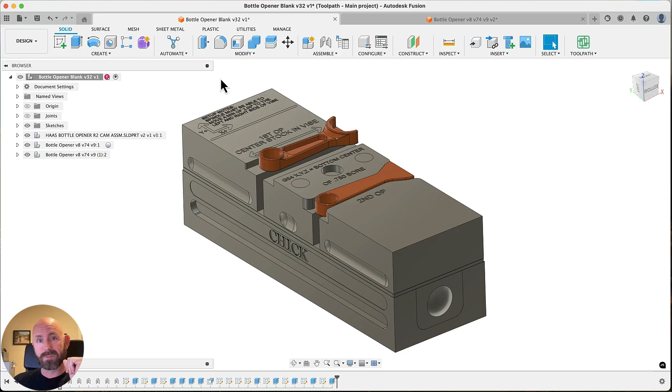All right, so here's the parts we're going to work on today for our chamfers. Some really good examples here of what I would call closed chamfers, just your basic chamfers. I think these are all the same size, but I'll show you a way to select these where it doesn't really matter what size the chamfers are. They can be all different sizes. And then we have some variable chamfers that change geometry throughout the closed contour. We have some 3D chamfers, and then we'll modify a part to show you how to machine this if it was a 3D chamfered edge with no modeled chamfer.

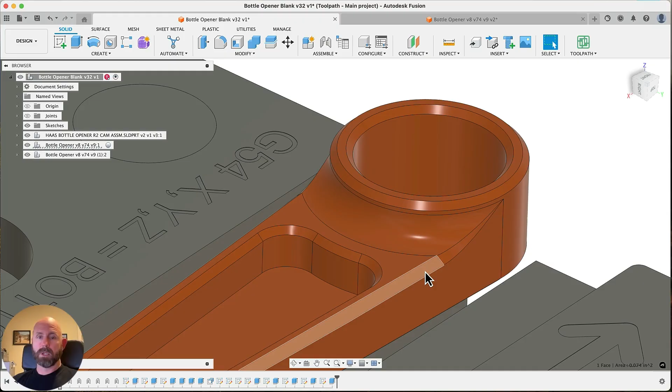And then we'll probably spend most of our time on this here, this kind of under chamfer. Show you a couple different ways to machine that with different tools. And then we'll show you this here, what I would usually call an open or blind chamfer. I think I showed you how to do that in a previous video, but I'll go into that a little deeper here. So with that said, let's get to work.

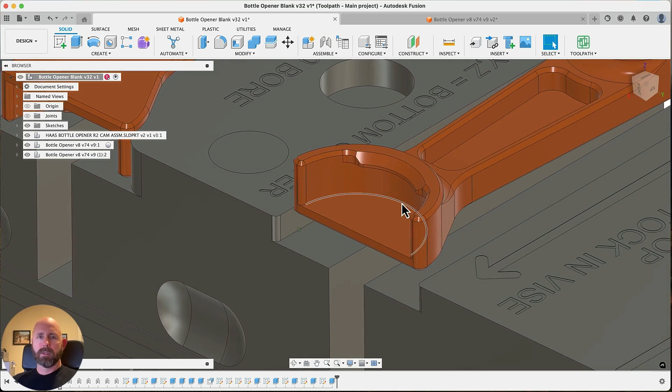Let's get some easy wins first. So we're going to go to the manufacturing tab. I already have the setup. I'm not cheating, but I just defined the solid as the stock and the part. So we're just banging on some chamfers. We want to start by getting our quick wins first, feel good about ourselves before we get too far.

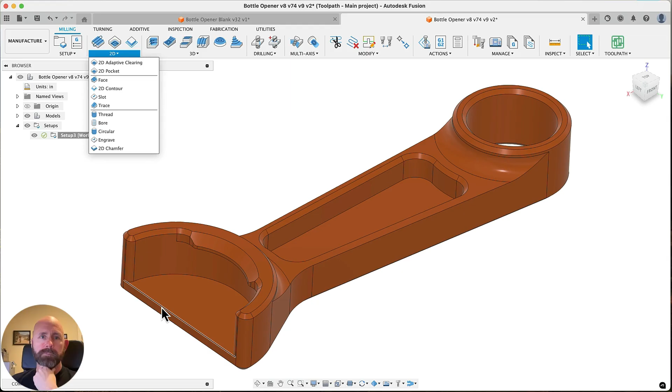We have two options. I like to use 2D contour for any closed chamfers like this, or closed contours. And then I save 2D chamfer pretty much only for this type of feature, a blind chamfer where it's going blind up against an adjacent wall. So let's start with a 2D contour. Let's get started by grabbing our 1/4 inch chamfer mill. I think we have one right here. And this is very simple.

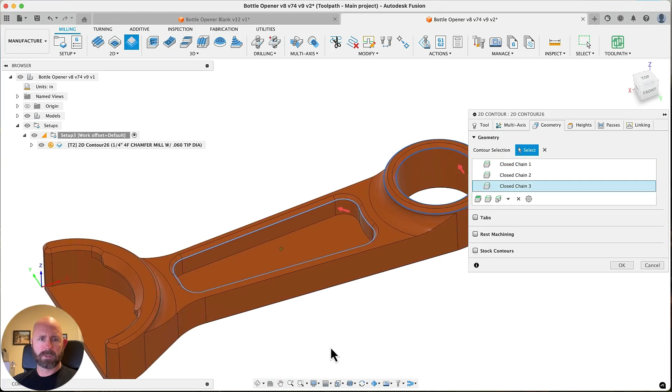I grab the bottom edge. Pretty much most people grab the bottom edge. And I grab all of my closed contour chamfers. So this would be the edge of the other side. And then let's just hit OK. I would not have done that, but I want to show you what we get with that. So if we go to this view and we come around, let's go over here, go here, go here. All right, this is what I'm getting at.

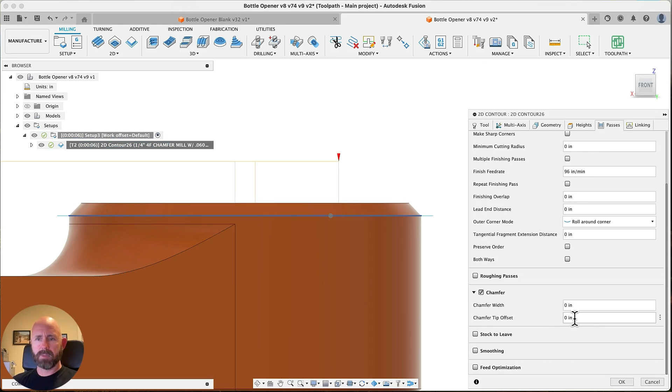So we get a one-to-one edge with that, and we don't want that. If anything's not perfect, you'll get a funny little edge there. Shouldn't be talking about a simple chamfer that long. So all we have to do is go to the passes tab and give it a tip offset of, really, we should be going as big as possible.

So when you get up to the better cutting condition of the tool. So if we go to simulate, go to that point. Now as we kind of push it through the toolpath here, we're way up. The higher you get up here, the better the cutting condition is, because the higher the surface speed, right? The closer you get down to a tip or a sharp tip tool, the closer the surface speed gets to 0. So generally you want to get up as high as you can, somewhere in the middle.

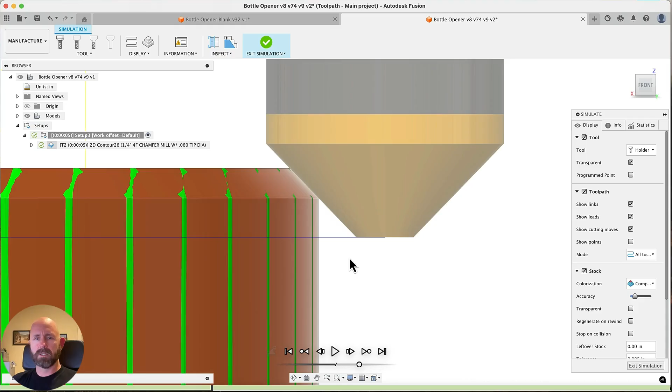Toolpath does a really good job of making these variable, but kind of utilizing the higher edge of the chamfer mill. So that works really good for that. So this was real simple. It probably took too long to explain that.

The next thing we want to do is probably talk about blind chamfers. So that's why I use this 2D chamfer tool here. And I would grab that, and honestly, I just hit OK. Now the magic behind that is that I have some really good defaults, and I'll show you those defaults. So let's hit simulate. Let's scrub down here. I think we're gonna just turn off the stock for now. But I like to get this open air here.

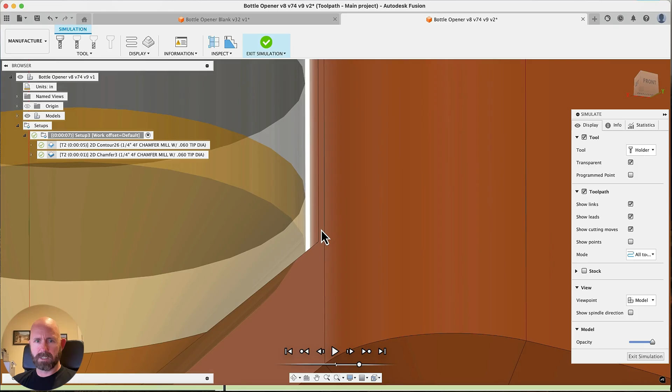So as I kind of scrub with my cursor left and right, I've shown this in other videos. It's one of the better tools you should know. Look at that clearance right there. Now we don't know how much that is, but I'll show you where to find that. And then you also have the upper edge of your tool, it's 10 thou above, maybe it's 5 thou, but it's 5 or 10 thou above that, and I'll show you where that's being driven from too.

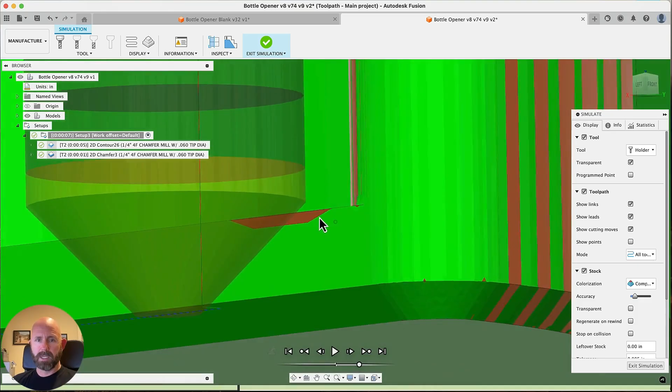But the nice thing is if you do turn on the stock, you can see how close you're getting to that edge. We could flirt with it and get even closer, but a little pro tip is the higher you get to this edge, the closer you get to that edge. So it's pretty basic geometry. That leaves a really nice chamfer there. Maybe hit this with a little fiber brush, a little wire brush or something if you have a little hairy stuff there. This is what we're making here.

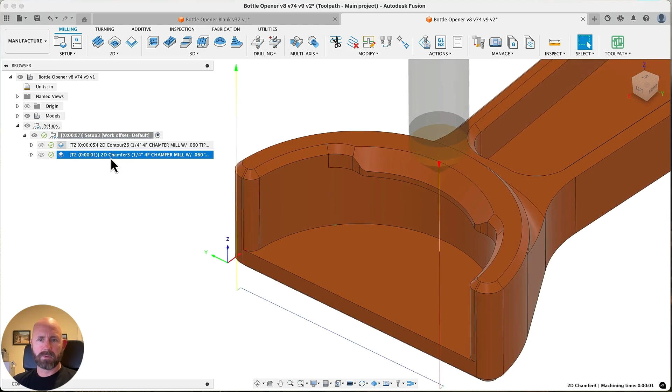All the toolpaths are in this here. So if you go down here, I have a bunch of locked toolpaths. So if you want to see how the key seat cutter and all that works, you can go do that. If you really want, we can dig into those videos. There's a little bit of a tricky key seat cutter move here that we can help you through if anybody needs that. So that is a 2D chamfer tool that sneaks you within 2 thou of this wall and gets really close there. So we've talked about how to do that in the past. I'll show it one more time.

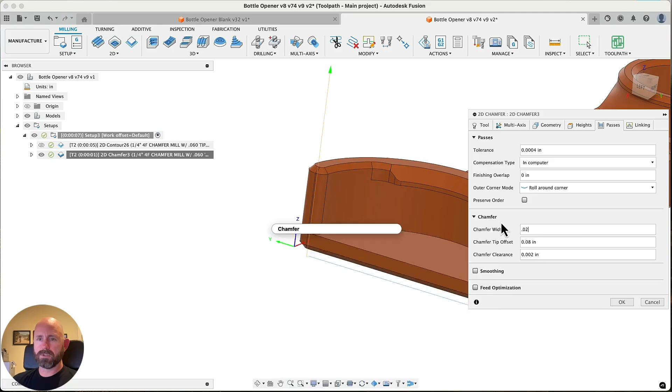It's pretty simple. It's taking the tool diameter, it's dividing that by 2. So that's half the tool. So for us, it's 125 thou. It's taking the tool tip diameter, the little flat at the end, and it's dividing that by 2. And what that's really getting is the cutting edge of the tool, right? From the flat up to the tip there.

And then what it's doing is it's subtracting the chamfer width. Don't worry about this, I'll explain this in a second. Because in that cutting area, you also need to account for the chamfer width, right? And then the next thing it does is this 5 thou. That's what I call your top clearance or whatever we want to call that. But that's where the top cutting edge is 5 thou above that flat surface. That's where this comes from.

If you're comfortable that your tool's accurate, if you're comfortable that surface is within a couple thou where it's supposed to be in the perfect model, 5 thou works good for me. Maybe you want to make that 7, 8, 9, 10, something like that. But this is a really good expression that I've been using for years, basically since this magic 2D chamfer tool came out. And then once you type all that in here, you're just going to go to these 3 dots and save as user default.

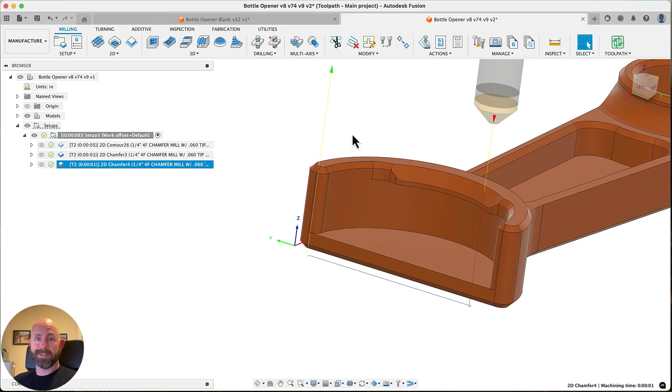And that's why that toolpath was so easy. I just went 2D chamfer. The last thing I did was chamfer, so that saved that. So there's 1, 2, 3 mouse clicks. Magic. So we have that done. Let's handle these odd chamfers next.

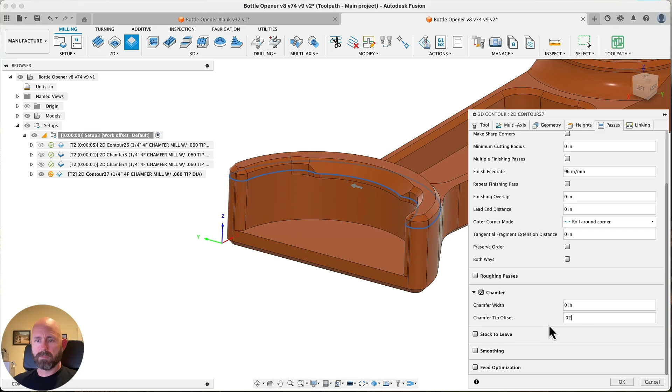So we'll come to 2D contour. Already have the chamfer tool. So we showed you with these chamfers, you grab the edge. I said bottom edge is what I meant to say over here. So what happens if you grab the bottom edge here, come over here, and give it, we'll say a 20 thou tip offset. It actually looks like it worked, right? So let's go see what actually happened.

So it looks good until you get there. So that violates the model pretty aggressively until it gets to that surface, and then it's happy. So how do we fix that? Well, if you go back and look at this, I programmed this a lot of years ago. If I come in here, you'll see I broke it into 2 different chamfers. To be honest, maybe I would do that again. Maybe I wouldn't. Treated them like 2 open kind of chamfers, which is easy enough to do.

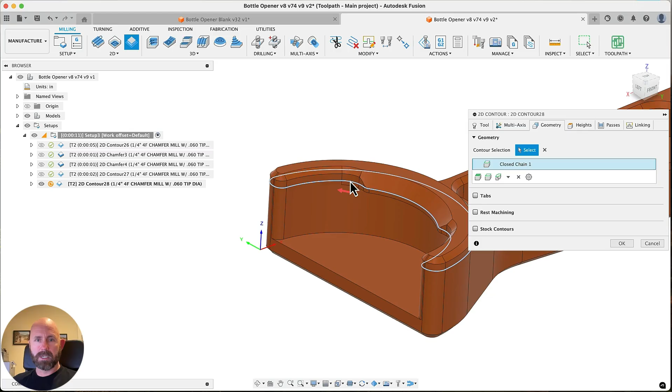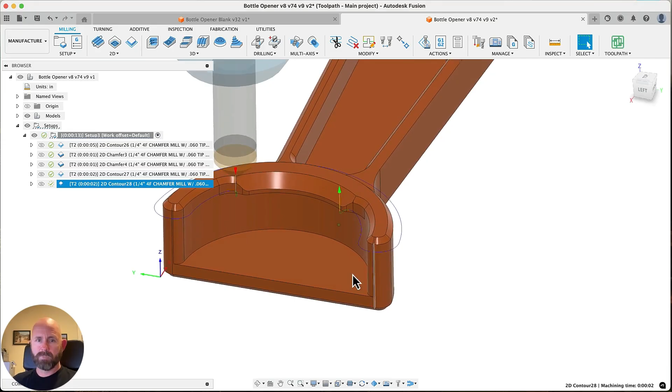You can go to 2D contour. You can click here. You could click it again. You could decide open chain, and then you can come around, actually kind of lead it that way, and then you can wrap it here and then there. Hit OK, and now we would come here. Give it some tip offset. So that will chamfer just that edge, right?

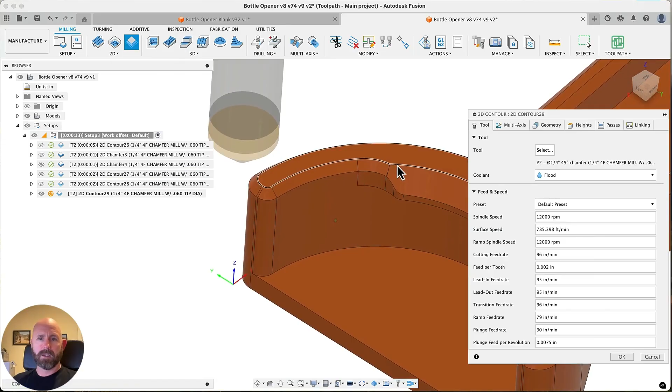I turn the stock off because I left that there. But you'll see it's giving me a good chamfer on that edge. But then you'll have to play with how it leads off and how that works with that. I wouldn't do that. If you get chamfers like this, you can just grab the top edge, and then let's say here we'll give it a 20 thou tip offset. Now I would actually make that bigger because I know what's going to happen, but I wanted to show you.

Let's go get rid of some of this garbage first so our stock simulation works good. Oh, I think I just got rid of the one I wanted to keep. No problem. So I'll grab this. We're going to give it a 20 thou tip offset. Looks like a good toolpath. We'll do simulate, turn stock on. And here's the problem, it's not violating our model at least, but it also is not going to chamfer that bottom edge. So we need to make that bigger.

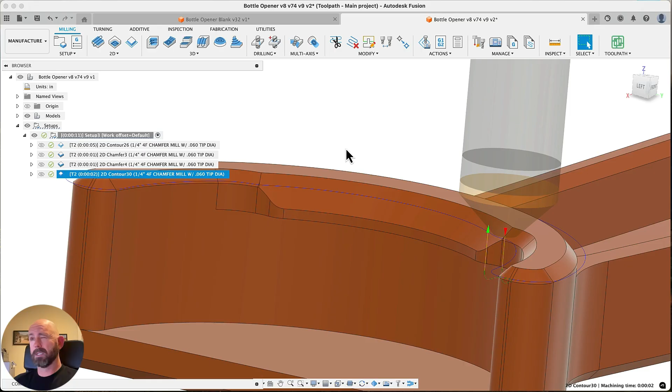Doing the quick math, this is 60, it's a 1/4 inch. We have a 1/4 inch 4-flute chamfer mill with a 60 thou tip diameter. So that's 125 is the radius, right? Minus the radial part of the tip. So it's 125 minus 30, you have 95. So I could give it a 95 thou tip offset, and that top edge would be equal to that edge. So let's give it a 75 thou. No, not negative. I'm going to give it a 75 thou.

This is my extracurricular activity. So these are kind of evening things for me. So my brain's already fried. Sorry about the mess ups.

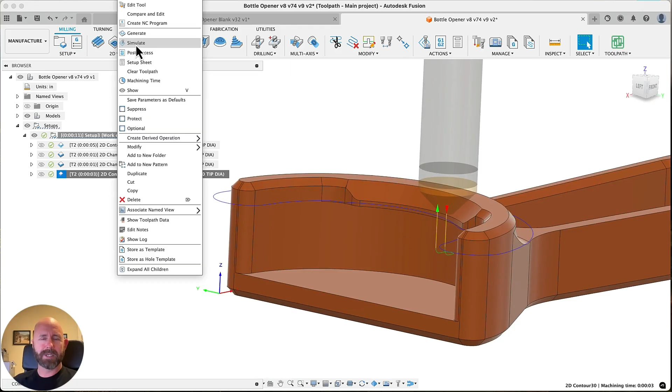All right. So now we're happy. Now we're cooking. This bottom edge is below that. The top edge is below that. I might flirt with that a little bit more and bring it down, but you get the idea. So that's how I'd handle that. I want to make sure to leave time for probably the biggest chunk of time we're going to spend on, this under chamfer here.

So first way to do that would be with a dovetail. And Toolpath is working on dovetail under chamfering. And that's probably the first thing you'll see for under chamfering with dovetails in Toolpath. So let's go grab a dovetail cutter. Yeah, so here's our dovetail cutter. And so you just grab here. Okay.

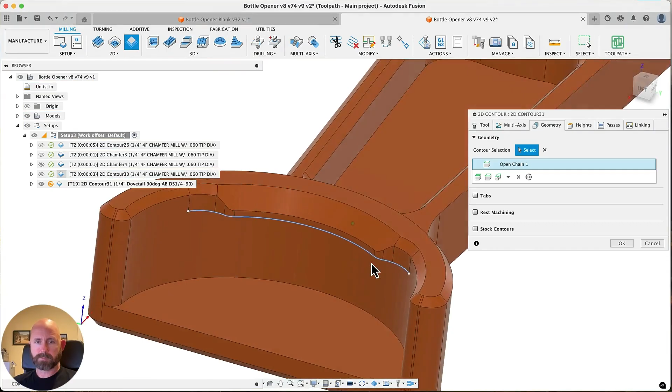If you've watched any of my other videos, I sure am tempted to just hit OK and see what we get. Go fix what we don't like. So let's simulate that. I'll stay consistent at least. I don't do a lot of things good, but I'm mostly consistent.

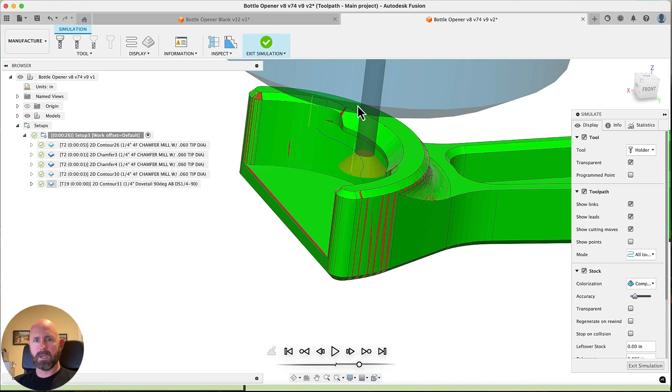So what's happening here? We're going online with that geometry selected. This would be a really good example of a situation where I would do inspect, I would do a section analysis, and I would split that sucker right there, because that will make our simulation visualizing what's actually happening way easier. If I come in here, you can see what's happening, right? So we're not actually chamfering. We might actually get rid of a burr for all we know. If we had a crappy burr there, we might get rid of it, but we're still going to leave a sharp edge. So how do we fix that?

The tool needs to come down and in. I do that with the stock to leave area in the passes tab. So if we go to edit, come down to stock to leave, we could go in 10 thou, -10, and we go down 10 thou. Now what do we get?

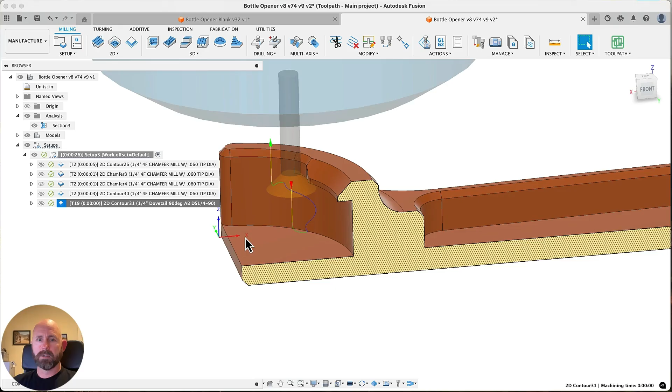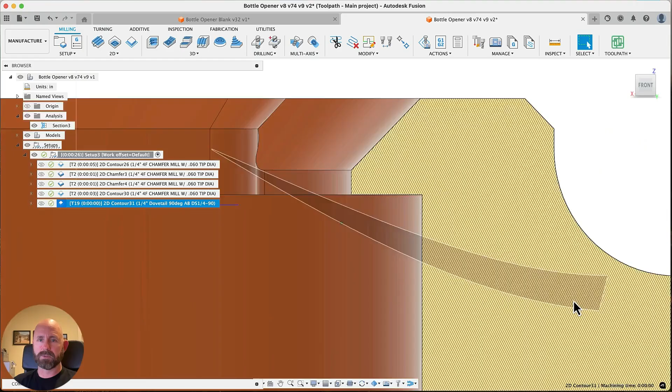I imagine some of you are screaming at the screen right now, and others are hopefully following and just listening. But scream at the screen is a valid reaction, because it's a 45-degree tool. You come down 10 thou and in 10 thou, you're still just touching it. You're getting rid of a burr, not getting rid of the sharp edge. So what we need to do is come down 10 thou and probably in 20, right? Luckily, it's a 45-degree tool, so the trig is very simple.

So go to edit, go back to passes, and then I'll just do -20. The axial is connected, so we'll break that and go -10. And that'll get us the chamfer we want. So we go there, go to front view, and let's advance this till we get the chamfer we want, right? Yeah, so that's good. That's exactly what I wanted. I wanted this 10 thou under it, and I wanted a 10 thou chamfer.

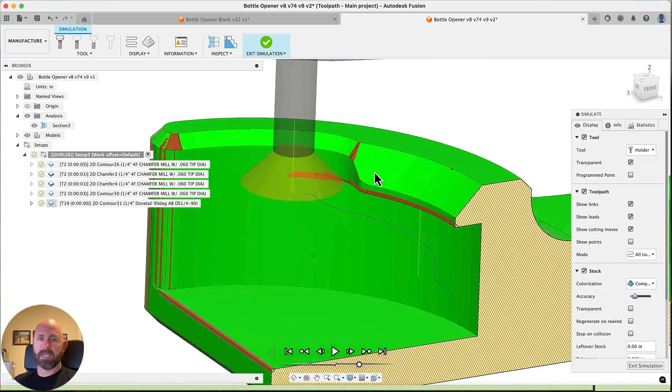Now, how does that look? Oh, so I just showed a problem there. On the lead out, we had a pretty good gouge. Maybe you don't care. My hope is that I'm showing you stuff that will let your parts come off the machine better, more consistent, less carpal tunnel from using these stupid whirly tools.

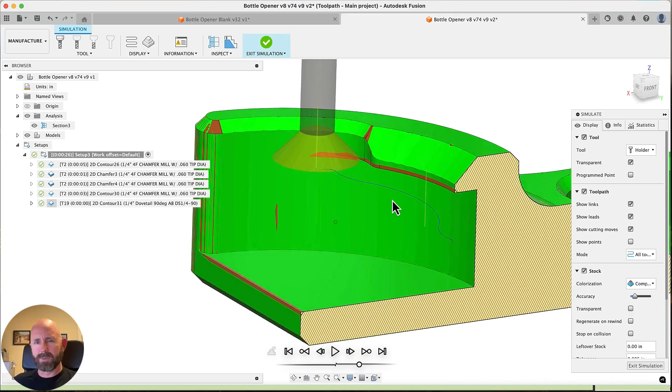But my idea is that you're not getting carpal tunnel. Your parts are super consistent. You're not scrapping parts by hand. So anyways, let's get back to this. How do we avoid that gouge?

Well, old school, before you had this automatic avoidance kind of 2D chamfer, or this other tool that I'm going to talk about in a second, we had to do this. We had to, and we still have to do it on these under chamfers. We had to come into the geometry tab. Well, first thing we want to do actually is get a good lead out. You typically don't want to do a radius lead out. So we're going to turn that off, meaning zeroed out. And we're going to turn on perpendicular lead outs.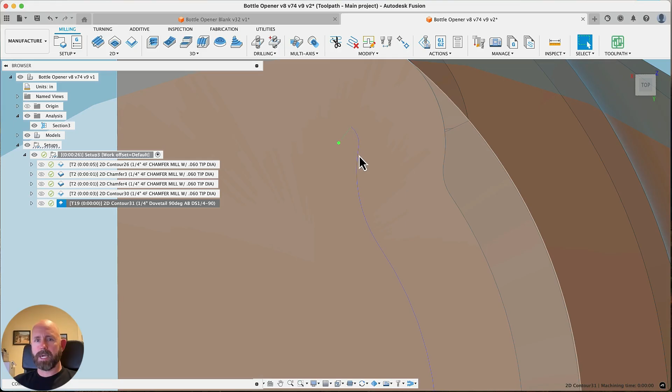That's not really going to fix our problem, but at least we know we don't have to worry about this other stuff. And the other thing we need to do is trim this backwards until it's not gouging that wall. So we're going to edit. A lot of people don't know about this. There used to be tangential extensions in the geometry tab. So you can do a negative tangential extension and pull the toolpath backwards. But the way you do that now is you either double click here or you right click and edit. And that functionality is opened up here. So if I open this up, it'll say start extension length or end extension length.

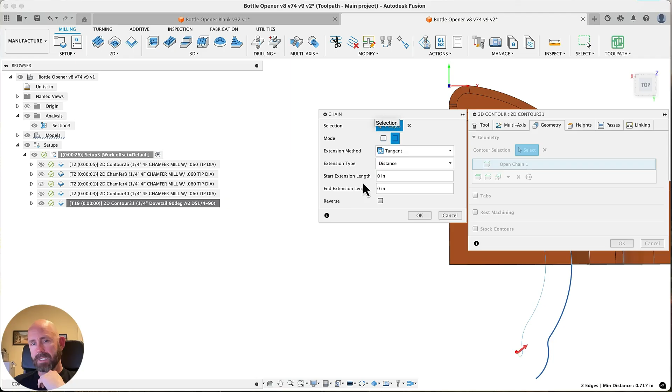And those could be negative values, which is exactly what we're doing here. So unfortunately, there's a couple ways. You can sketch it out. You can do a bunch of sketches and figure out where you need to go. You can even drive it on a sketch. That's old school. I used to have to do that.

I've got hundreds and hundreds of hours into doing these types of chamfers. But I also have a lot of people that appreciated my final finished parts. So cheers to that.

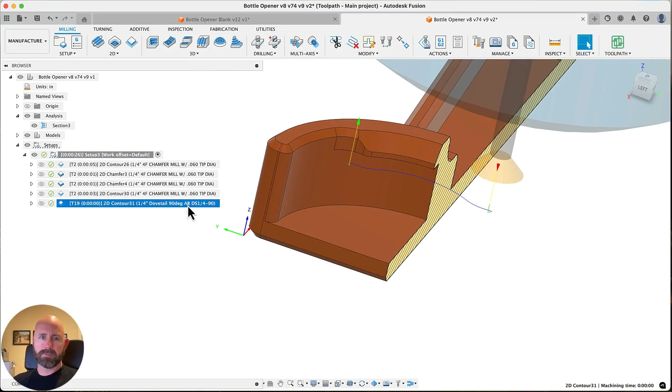Anyways, let's do a -50 thou. Usually you can get it within a few guesses, to be honest, as much as I hate guessing. Then you do simulate. I usually just kind of go straight to that point right there. I'm still gouging. So we had it at 50. We can go to some bigger value. Let's guess at like 145 thou. Oops, let's type that in properly. Negative 145 thou. Let's see what that gets us.

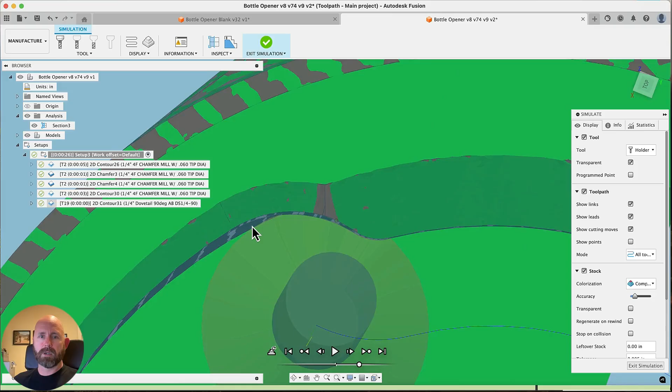There we go. So we're missing the wall. That's a little too much, to be honest. I would flirt with it back and forth. I'll spare you guys. We can still squeeze in there a little bit more, the closer you get to this tip, and honestly, we might even want to use a smaller tool. I think this is 130 thou radius here. If we use a smaller diameter tool, we can sneak closer to that edge. Kind of go back and forth.

Did I get lucky with the 145 thou? No, I did a dry run on this before to make sure I wasn't going to embarrass myself in front of you guys too much, and I took some notes. But that's basically how you handle that. Used to be if you want to do a chamfer like this, you would have to do that negative tangential extension and keep going back and forth until you didn't collide into that wall.

I suspect, now I'm not giving you any futures, but I suspect my buddy Justin and our development team will watch this video and hopefully get inspired to solve these problems. That's the kind of stuff we're really looking to do at Toolpath, that mundane, hard work. We want to let you use your brain to do more creative things, solve tolerance problems, solve fixturing problems, and things like that. Computers actually do a really good job of this stuff. But for now, that's how you do it.

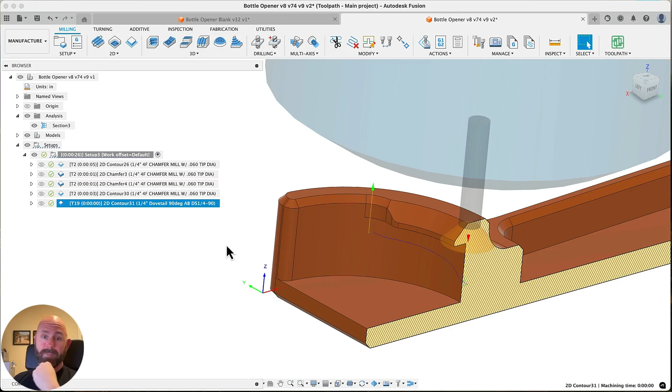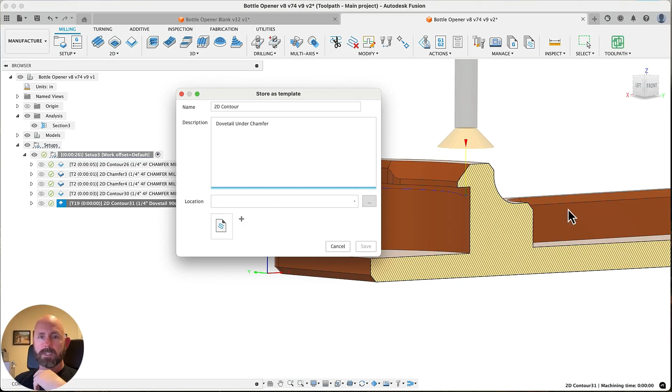I'm telling you 1,000 times over, I would much rather spend an extra 2 or 3 minutes doing this, and then maybe even coming here, store as template, and say dovetail under chamfer. I'm messing up on my other screen. I had to go pick my cloud library. Hit save.

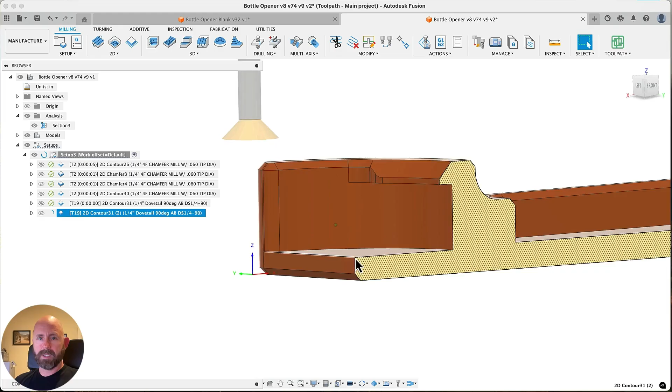Okay. So now what I could do is here I could say create from template. I'll go select template. We can do a whole thing on just that. So dovetail under chamfer, select. I think I wrote over my buddy's chamfer. Do this, turn the analysis off, and then all I have to do now is repick that geometry, and then we're good. That's probably a pretty good reason to use that template workflow.

So another more common, I call it a side chamfer tool, at least what I and a lot of my friends use, is if I go to Harvey, it's like a double angled chamfer tool. If I go to products, go to double angle shank cutters, that's kind of a weird name. This one, I use a lot of these. I have them out in my garage for my Haas out there. I would search for 90, maybe 250. We have to decide what we want now. Let's just use this 1 inch here.

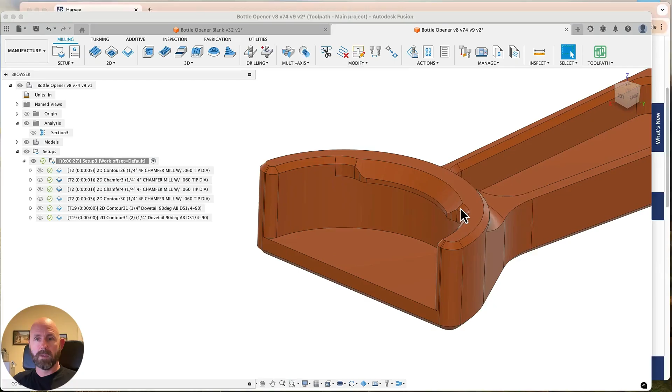Okay, so here's how you have to do this. Unfortunately, Fusion doesn't have a way to define these tools yet, and we're exploring this with Toolpath. How do we want to use tools like this? But for now, you're going to download the DXF, and you're going to learn how to create a form tool. This is pretty important, so pay attention. Get your pencils out. Okay, so I like to go to a new design and then do an insert DXF.

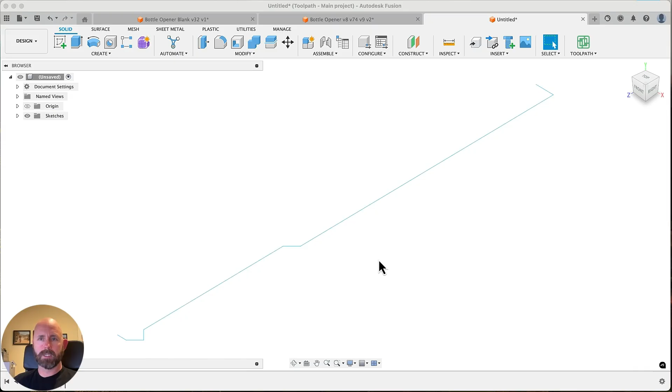You can pick any plane you want to put it on. I have a habit of putting it on the top plane. And then you go find that DXF, which is in my downloads folder, and hit OK. And there's your DXF. Now what the heck do we do with this thing, right? So we're going to right click and edit this sketch. And we need a center line for that sketch. So I'll just create a center line. If you guys didn't know that trick, by the way, I'm just hitting S on my keyboard. I'm actually hitting S on my Space Pilot.

I like them. That's how I also get these kind of smoother moves. I'm not here selling space pilots, but do a line, do it from here to here. Undefined blue sketches give me anxiety, but I'll ignore it for now.

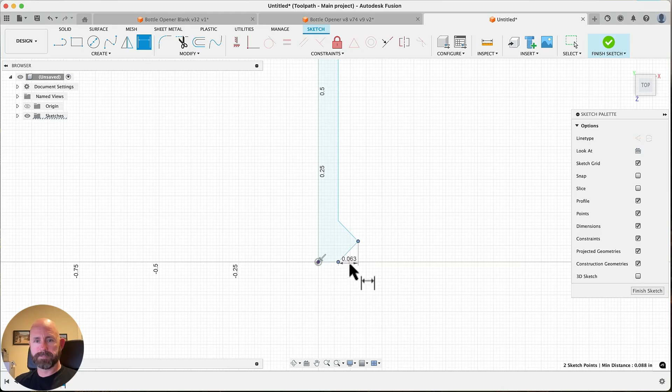And then one thing I like to do is always get this measurement here. No, this measurement here. So 62.5 thou, 16th of an inch. It's not the dumbest thing you could do to get this dimension here either. Well, I already knew it because we searched for that 1/4 inch tool, right? But so you need double this because this diameter is what we're going to drive the tool off of.

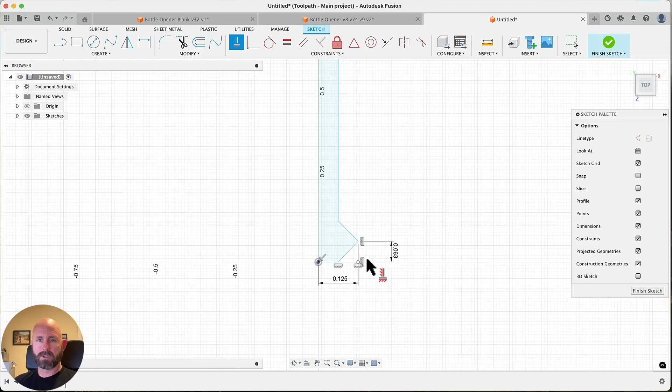And then the other thing we're going to do is we're going to put a sketch point. I'll just put it down here, and then we're going to constrain it from here to here, and then we're going to constrain it from there to there. So horizontal and vertical to basically the convergent point or the intersection point of this. That's going to be called later. We're going to use that as a control point.

Okay, so we're going to finish that sketch. And then we're going to go to the manufacturing space. We're going to go to manage form tool. So we're going to pick a tool profile. We're going to pick a tool axis. That's the center line of the tool. We want to make sure our arrow is pointing towards the business end, the parts, right? So we'll flip that axis, make sure our red arrow is pointing towards what we want to cut.

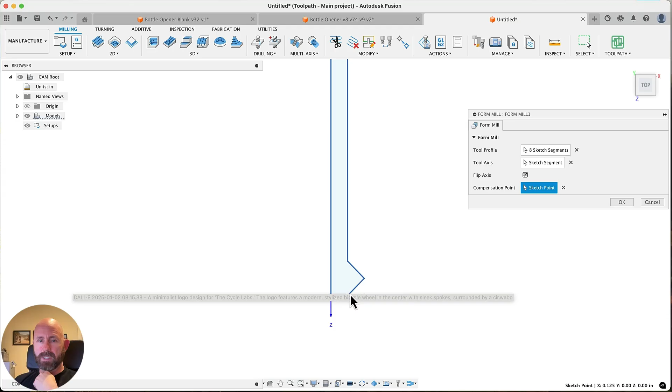And then the compensation point, that's this point right here. So if I do a probe in my machine, or if I'm using wear compensation, it's actually going to be driving it from this point. That's the Z bottom, and that's the Z top. Now you could drive it up there. There's lots of reasons you would do that. We're not going to talk about that now.

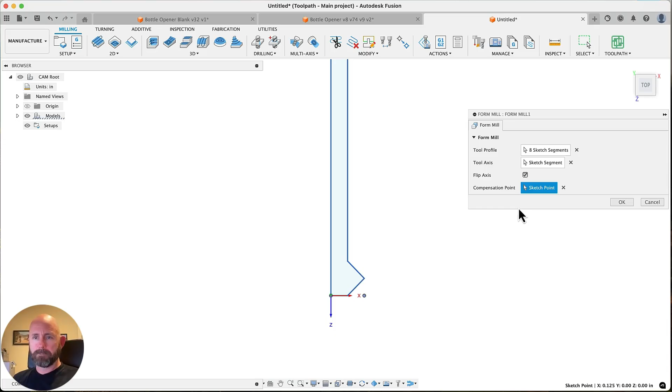Generally, it's going to be for like a port tool, something like that, where you have a more critical dimension that you want to drive it off of. You know, a comparator, optical comparator, or something that you're setting the tools with. For now, we're going to put it right there. Hit OK, and it appears that nothing happened.

Form tools, I'll give them some grace. I was one of the product managers for the tool library a long time ago for Fusion. They had some resource shuffling, and Form Tools was basically made as a minimum viable product, and then it was finished later. So what happened is we just had that untitled document, and it just created a form tool.

So I think I did it without talking, but what I did is I opened up the tool library, and then I went to the untitled, and we have our form tool. So now what I would do is I would copy it from here. I'd right click and copy. I'd go put it in a library. We'll skip that for now, but I'd go put it in a library.

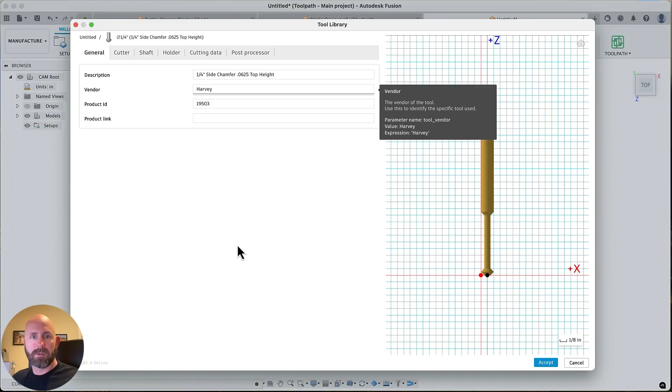I'd call this 1/4 inch side chamfer, and then what I do is I do 0.0625 top height. Since I've got your attention, it's not bad hygiene to put in the vendor. The product ID would be here, 19503, and then to be honest, I do love being able to do this. I copy this and I put it here. I don't know how crappy that's going to be for your video, but hopefully that comes out.

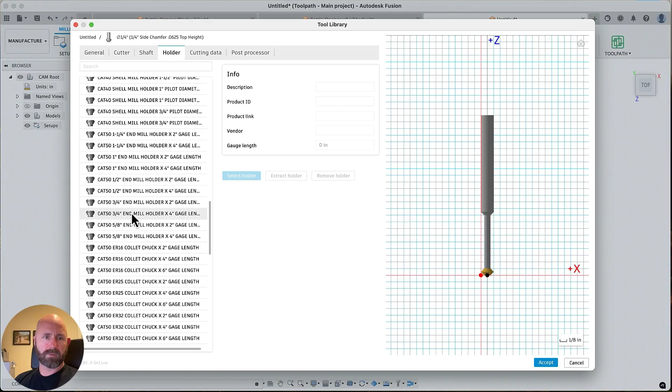So then the only thing I do here is I don't actually have a flute length of the whole tool, so I would do a flute length of should be 0.125. Yeah, so now I can cut that area. Length below holder, let's just make 1 inch, and then I go pick a holder. I got a lot of these Haas Cat 40 ER25s out in my shop, so I'll use one of those.

No, let's go back to cutter. That's going to drive me nuts. So let's do, I don't know, 125 thou. Yeah, that's about how I would have it set up, right? I would measure it and then set it up properly, just for the record. So then cutting data, I'm going to run this thing at 12,000 RPM.

I realized I didn't put a cutter, so we're gonna have 4 flutes on that. I'm gonna do a chip load of 4 thou per tooth. I'm gonna haul butt around that thing. Maybe I'll do 3. I would do 4 just for the record. Some of you guys like CJ get scared when they see that. Okay, so that's good. So how do we use that tool?

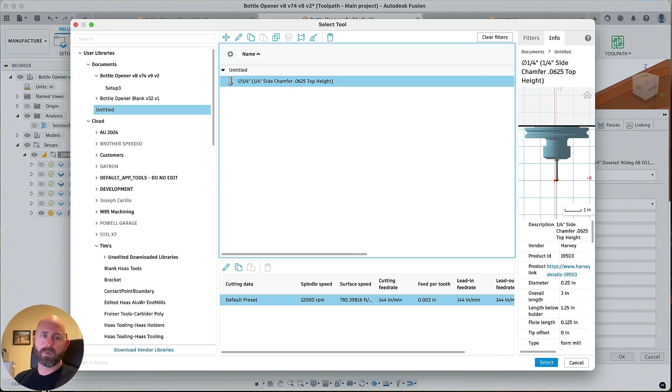So I put that note in there. I'll show you why I put that note in there. So let's get rid of this dovetail so our simulation works good. I'd come over here. Let's just go to Untitled, grab this tool. I would have stored that in one of my tool libraries, I mean. That flute length is concerning to me, but whatever. See over here in the note where it says 62.5 thou top height? I think I actually grabbed the wrong tool, whatever.

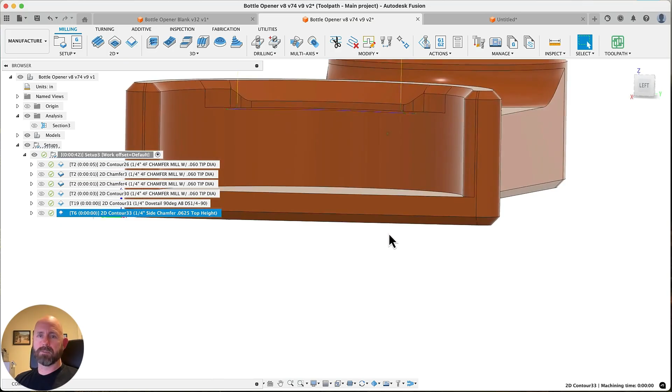Go to geometry, pick here. And then it's the same. Oh, this is a similar thing, right? The bottom of the tool ends up here. That's not what we want. We want this part of the tool to be down there. So what we have to do is go to the passes tab, stock to leave. Let's zero out radial for now, and then do a negative 62.5 thou. And then turn the section analysis on, simulate.

And then when we run through, you'll see here, we basically get a point-to-point like we had with that dovetail, right? It looks like I didn't delete that dovetail. Okay. So anyways, we had a point-to-point. So we got to do the same thing we did with the dovetail tool. But we have an additional this, right? So we're going to do a negative 20 thou here. And I'm going to do an additional negative here.

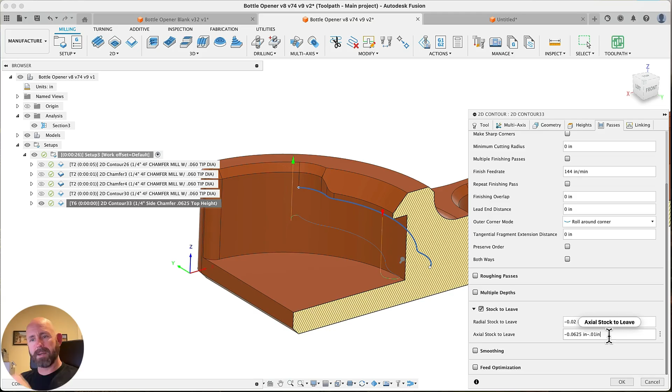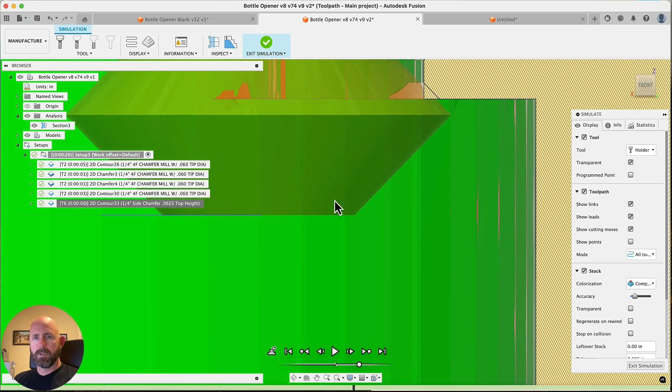Type in inches to make sure that you're using inches. I say that because if you type in just a number, the kernel's metric, so typing in inches will ensure that you get the desired result. So that should get us what we had in that last toolpath. Let's simulate this. Yeah. Just like that.

Now, the nice thing here is you can use this tool to chamfer on the bottom. You can use it to under chamfer. You can chamfer here. You can just use it all over the place. A lot of people like dovetail cutters too. My experience is that this edge is tougher. So I've cut a lot of kind of harder materials, and these tend to survive those cuts better. So this is a more general tool. Instead of having a dovetail for aluminum and this, that works really good just to use these.

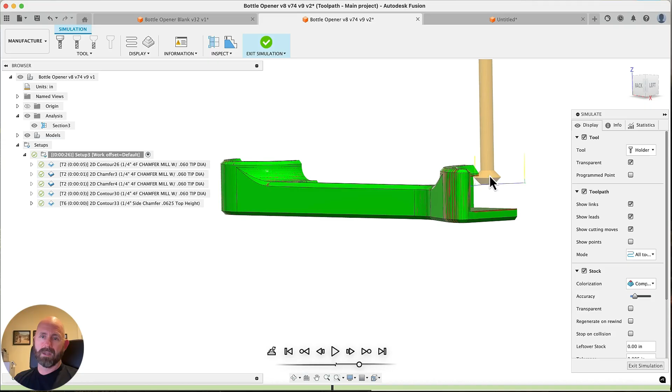The only thing I would say there, some people like to under chamfer their first op. And then that way when they flip it over, they basically face it and they're done. And then you don't have any misalignment issues if for some reason that was a concern. That might be better with a dovetail cutter on aluminum, unless you want to hold on to more material. If you have more material to clear your fixtures, I still use these. They're great. I think I covered that. I think that's about as deep as we need to go there.

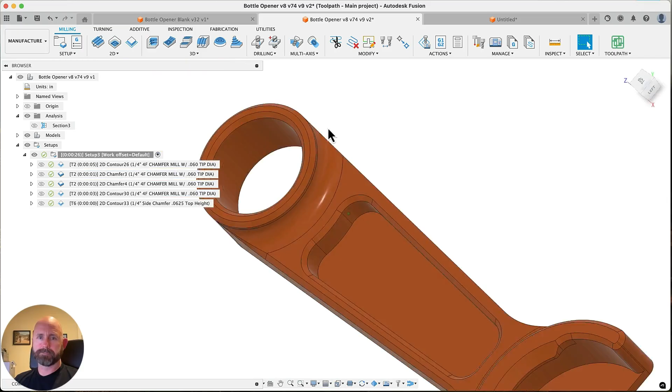So 3D chamfers. If you go back and watch probably the 3D containment toolpath video, Ben maybe put a link there or wherever. I'm sure I covered the chamfers, but let's do it one more time. So we're going to use a ball mill for modeled chamfers, 3D modeled chamfers like this. I really like. This thing's been through the dishwasher 100 times. But I just really like these nice 3D chamfers, they are a really good feature on a part. Adds just a really nice touch to it.

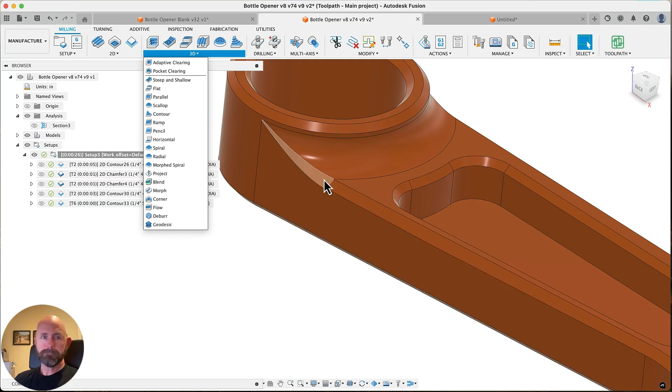I'll start off with scallop because it's easy. Everybody starts off with scallop. Go to selection. If this is losing you, go back and watch that containment video that Ben linked to. That's probably worth it. I can't talk about selections enough. So the selection manager, I clicked this geometry, didn't get exactly what I wanted, so I just clicked it again. The selection manager popped up. I went ahead of where it made the wrong turn.

Said, no, go this way. I just confirmed that it went where I wanted there, and it didn't. So I'm going clockwise around it. It made the wrong turn here. I go ahead of it, click there, hit OK. Now that is the geometry we wanted.

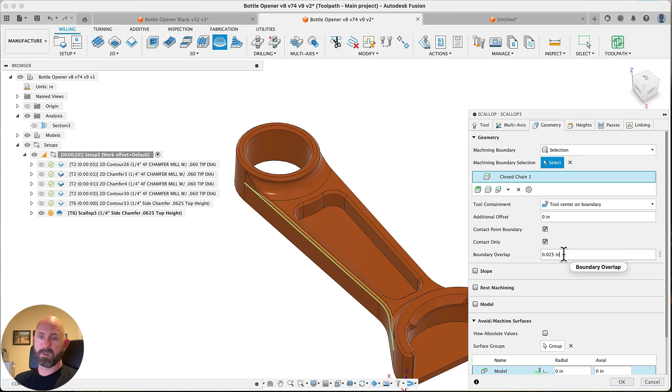If you watched a previous video, you don't have to watch me go through all these settings, but I would turn on contact point boundary. I would zero this out. Man, we'll play with this in a minute. I can't hit that home enough. Passes, let's make this something small.

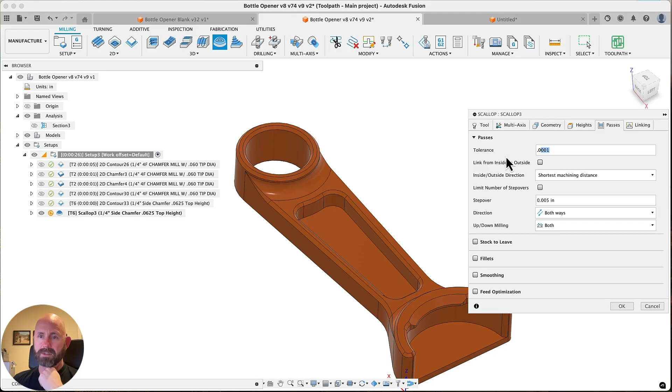And then when you're doing segment geometry like this, it's really good to have a small tolerance. So my default on these little segment geometries is like a tenth tolerance. Let's see what we get. Looks like I grabbed the wrong tool. I thought I grabbed the ball mill. Apparently I didn't. All right, it's pretty messy. Pretty messy. So let's go back to edit.

And if you watched the containment videos, the first thing I'm going to do here is type in negative tolerance. See what that does for us. Cleaned it up a lot, didn't it? We still have some noise out here, and it's just kind of a function of the geometry and the toolpath. So I can do a lot of different things. I can just start coming here, go to create a derived operation, and just start trying other toolpaths.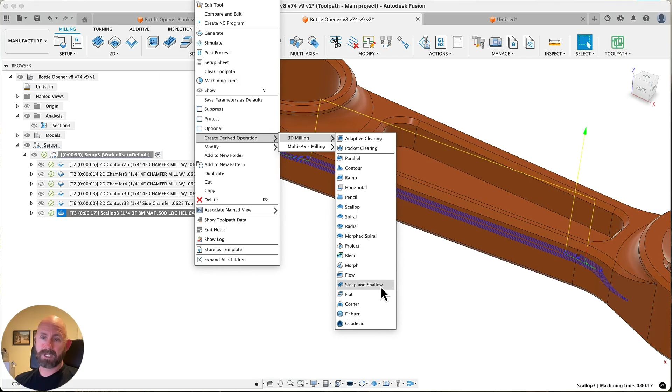Maybe I would do steep and shallow. I actually know which one I would do, but maybe I'd do steep and shallow, and we can get maybe a cleaner toolpath by limiting this to shallow only. And so we have access to the steep and shallow scallop that comes from the Delcam kernel. I don't know, it seems like not a bad place to start. It's a little better. It doesn't quite go up and catch this feathery stuff though.

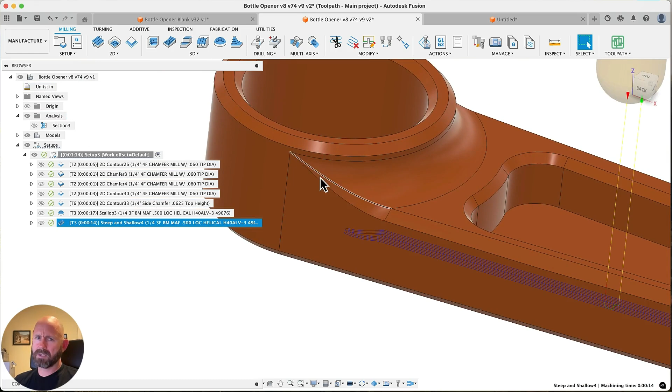So really what I would do is I really like this geodesic toolpath that comes from our friends at ModuleWorks. Shout out to those guys. They've really changed the industry since I've been in the industry. It's been fun to watch how much they've changed the industry with their pretty rad toolpaths. And fun fact, we have a strategic partnership with ModuleWorks, and we leverage their toolpaths kind of in the background. So hopefully you'll see some more interesting things with them surface over the months and years.

So geodesic, go to geometry. Because we did the derived toolpath, that came over with the geometry selection. It does want drive surfaces though, so let's give it what it wants. If you know me, you know I like to hit OK and see what happens. Holy smokes, that looks good. That is a good looking toolpath. Maybe it's way too many passes for just a chamfer.

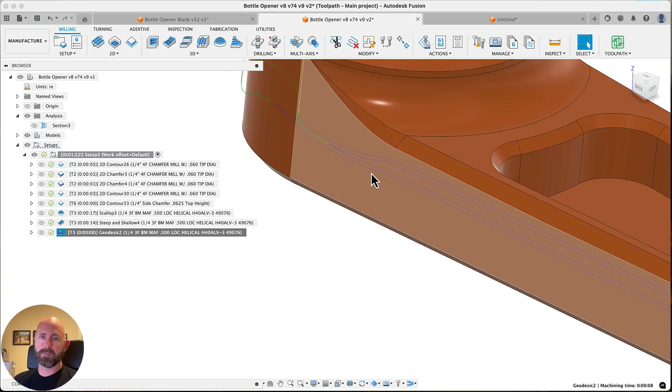So we have options there. Maybe we can limit the number of step overs and go 2. Maybe let this be 10, something like that. It's still a cusp height of 3/10. Not 3 thou, but 3/10. Try that. And I limited the number of step overs, right? So that's pretty important. So I give it a couple step overs on each side of the center. I would probably run that. I probably would.

Maybe I'll give it a 1 thou step over, 1 thou cusp height. See what that gets us. And then if you're just trying to micromanage it for cycle time, we can go from 8 seconds to this. That's just 1. That's 2 seconds. I personally, with that big of a chamfer, would probably have it 2. So I'd probably let it do 8 seconds on each side. Well, it really depends on the quantity I'm doing, right?

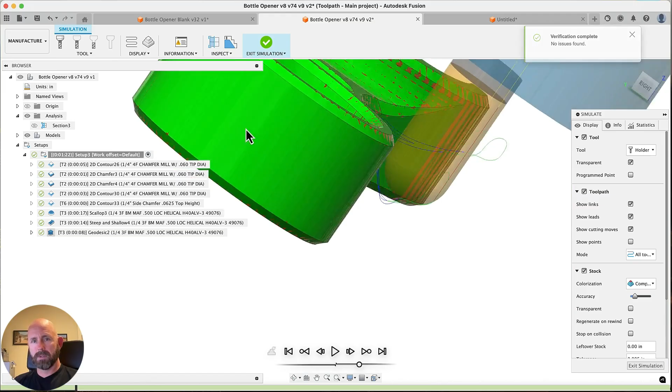But that would look really, really good if I do a simulation. Come all the way out to this tip here. You can see it's really coming out. And it's hitting this hole, it's feathering that edge in there. It's just a really nice setup. Geodesic has become a lot of people's favorite toolpath. Maybe we'll do some 5-axis stuff. I did this part with geodesic. There's some really cool stuff with that. So we'll see how that goes.

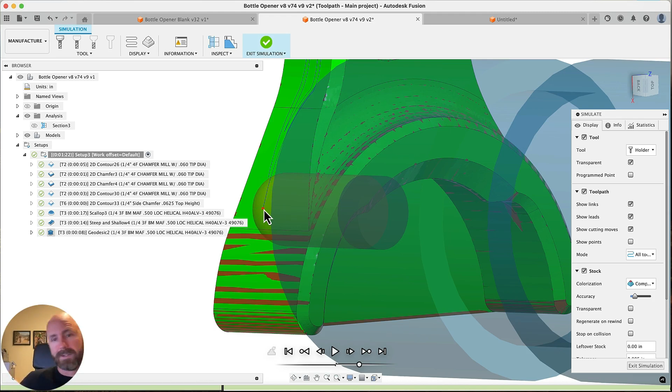Shout out to the ModuleWorks boys. That's a good toolpath. That's a really good toolpath. And another shout out to our ModuleWorks friends.

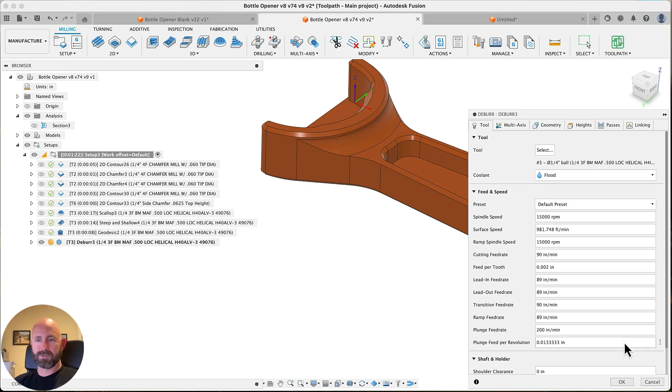We already have the ball mill selected, so let's delete that. So we have 1 click, 2 clicks, we already have the tool picked, 3 mouse clicks, 4 because I missed it the first time. 3 or 4 mouse clicks, 4 if you miss the button.

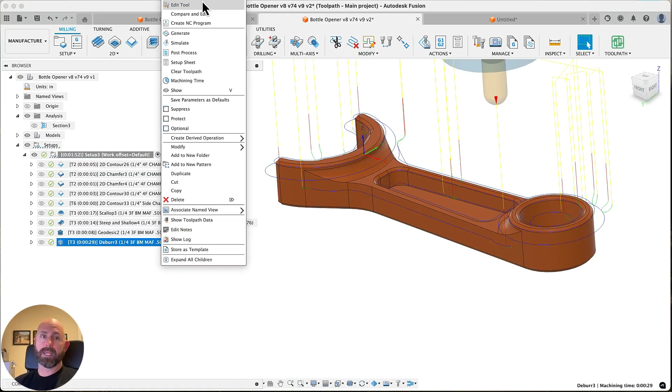You're probably saying, what the heck's happening? Well, it's picking up hard edges, this hard edge, that hard edge. So we have a couple ways to manage that. The way I would manage it, I'll show you first. Let's duplicate this so I can show you a couple ways. I didn't practice, so we'll see how we do. We'll duplicate it, and then we'll come back and edit this.

The way I would actually do it is I would come to edges to deburr, and I would do selection, and I would just pick this edge. I would click it again to turn on the selection manager. I'd make sure I had open chain. I'd pick the last segment in that chain, and then I would hit OK.

And I would get a really, really nice toolpath that deburrs that in 2 seconds. Without gouging the side of my thing, without cutting my wrist, without getting carpal tunnel. I need to save my wrists for my dirt biking, and I'd be happy.

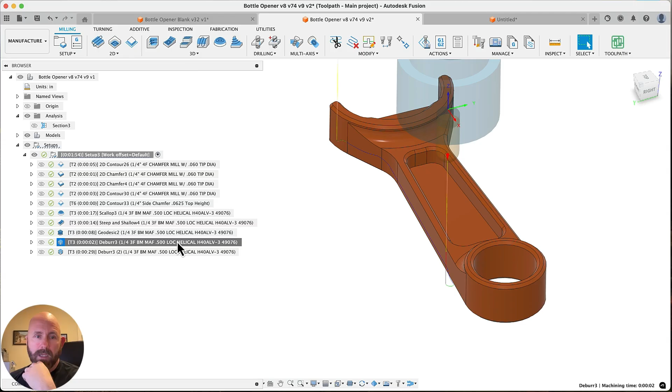So let's dig into that real quick, because that is a pretty fat chamfer. If we were looking for something more like that, that's probably a 30 thou chamfer. We can come to the passes tab. We can tell it we wanted a 30 thou chamfer, and then we can do multiple passes. Maybe we want 3 passes. Probably do something like that. Holy smokes, that is a really nice looking toolpath.

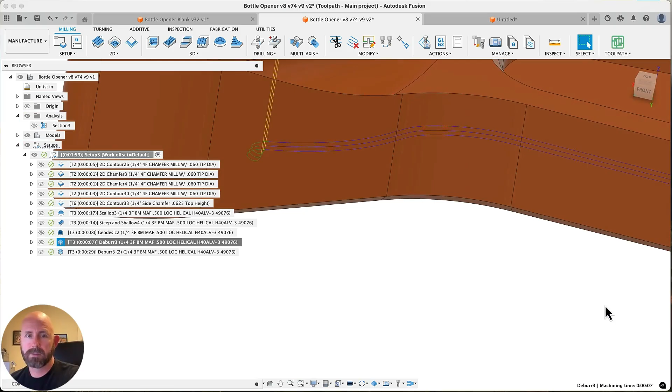Really nice looking toolpath. If we wanted to get back into that, I thought there was a both ways option. Maybe I was wrong. Okay, so let's get into this one. There's some other controls that I haven't looked at in a long time, to be honest. So if we go here, it's this minimum edge angle. So what happens if we do, we're going for 90, right? It's been a while since I played with this.

So what we're really looking to do is hit everything, minimum edge angle, let's say 50 degrees. What happens if we do 50 degrees? Because I think that gets rid of, okay, it gets into some of this weird stuff. But my hope was that it would just get rid of the 45s, right? But you can control it with a minimum angle. I almost never use that. So that's why I tried it on live TV, right?

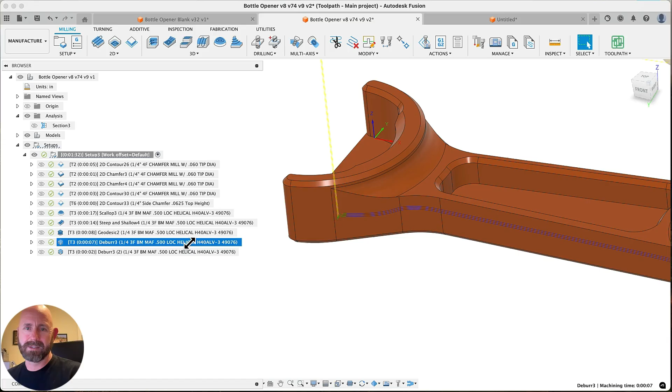Yeah, so you'd get this and you'd get that, which is pretty good. It actually looks like it's missing some of this. So that's kind of the reason. You see how this goes out there really nice? If you just have a handful of chamfers, you can go grab it. Just go grab the specific geometry you want to do.